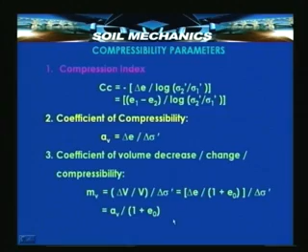What is important to notice is that Cc is a non-dimensional parameter dependent upon void ratio change and the logarithm of stress change, whereas Av, the coefficient of compressibility, depends upon the volumetric change or void ratio change and the stress change, particularly effective stress. Mv is nothing but Av divided by the constant volume of the solids. If the total volume is 1 plus E0, the volume of solids is 1 upon 1 plus E0 at any point of time, where E0 is the initial void ratio.

Therefore, Av upon 1 plus E0 is a parameter that represents compressibility in terms of the original volume of solids, which is invariant. This serves as a convenient denominator parameter for comparing different clays or soils with different Av values or different degrees of compressibility.

Let us take a quick look at the analogy, since we are going into the mathematical representation of this analogy. We defined a cylinder with a piston and a spring with an outlet for water. The cylinder represented the soil, the spring represented the soil skeleton, water represented the pore fluid, and the piston with its opening represented the pores, while the valve represented the degree of opening of the voids, or the permeability of the soil.

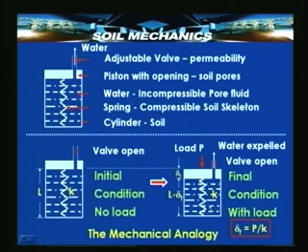Initially the soil is at rest, so there is no excess hydrostatic pressure because there is no load. But the moment you apply a load at t equal to 0, the water takes the load and gradually passes it on to the solids. Ultimately, at t equal to infinity, water would have escaped to such an extent as to bring back hydrostatic equilibrium, and the spring would have compressed by an amount delta final, equal to the load now completely transferred to the spring, P divided by the spring constant K, where P is the applied load.

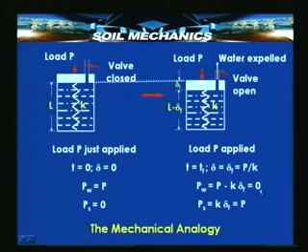If we take the consolidation part alone, as soon as we apply load at t equal to 0, there is no deformation of the spring. The load carried by the water is the complete load P, and the load carried by the solids is 0. But at the end of the consolidation phenomenon, the situation is different: the load carried by water is P minus the load carried by the spring. At t equal to infinity, K delta F becomes equal to P, and therefore water carries no load, whereas the solids carry the entire load P.

Now let us see the real situation. If we apply a surcharge Q, there is an initial pore pressure U equal to Q. When you apply the load at t equal to 0, U will be equal to Q and sigma dash is equal to 0. At the end of the consolidation phenomenon, the pore pressure is equal to U final and sigma dash is equal to sigma final. If we proceed further, the pore pressure gradually gets dissipated until U becomes equal to 0, and the entire sigma dash is carried by the solids in the form of Q.

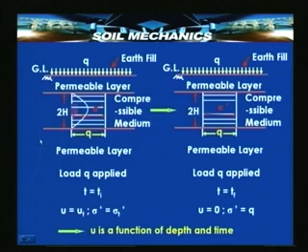This excess hydrostatic pressure U is a function of depth and time. This is the variation of U at any point of time. It is worth mentioning that it is 0 at the top permeable layer and also 0 at the bottom permeable layer. At t equal to 0, as soon as we apply the load, the entire applied pressure Q is carried by the water, and the water takes up a pore pressure U, an excess hydrostatic pressure over and above the hydrostatic, equal to U throughout its depth.

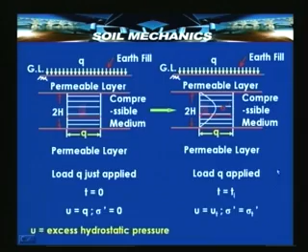Since the upper layer is permeable and the lower layer is also permeable, at these two points inside the clay layer, the compressible layer, the pressure is U, whereas just outside, because it is a draining layer, the pressure is 0. That means there is an infinite hydraulic gradient, so instantly the pore pressure U gets dissipated completely. That is why pore pressure is 0 at the two ends and maximum at the center, and this goes on. The ends constantly have pressure U equal to 0, whereas at the center the pore pressure is maximum, but its value keeps changing with time, ultimately decreasing to such an extent as to transfer the entire load to the solids in the form of sigma dash.

Now let us take a look at the mathematical formulation quickly, to the extent we had introduced it last time. We defined a number of parameters.

One is AV. AV is nothing but minus dE by dP, that is, the rate of change of void ratio with pressure, showing how the void ratio changes as pressure is increased. Since the void ratio decreases with increase in pressure, AV is minus dE by dP.

We also defined a parameter called the degree of consolidation corresponding to any depth, in terms of E. You may express it, as is usual, in the form of a percent. This is denoted as Uz, the degree of consolidation at any depth z. It will be equal to, at any given point of time, the initial void ratio minus the void ratio at that depth at that time, divided by the total change in void ratio.

This void ratio has to be related to pressure, and through the pressure it has to be related to the excess hydrostatic pressure. Then we can relate that to the rate at which water flows out, so that we can get the value of degree of consolidation at any point of time.

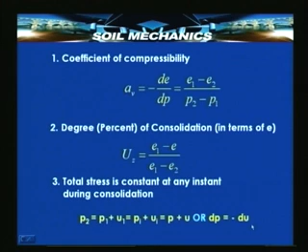So this gives us a way to express the degree of consolidation through E1 minus E, P minus P1, and finally Ui minus U. We get the degree of consolidation as 1 minus U upon Ui, where Ui is the initial excess hydrostatic pressure, and we know that the initial excess hydrostatic pressure is nothing but the external stress applied, that is in our case Q.

So if we sum up all this, dE is equal to minus AV dP, and it is also equal to AV dU. So here we have the indication as to how to link the change in hydrostatic pressure, excess pressure for that matter, through the change in stress to the degree of consolidation or change in void ratio.

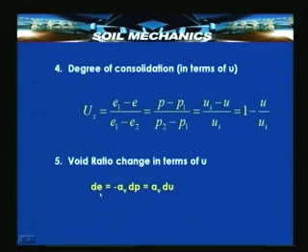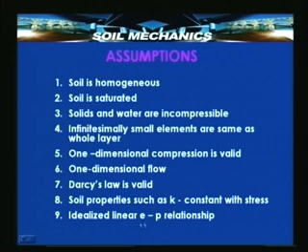For this purpose we made a series of assumptions: homogeneous, saturated, incompressible, one dimensional compression is valid, Darcy's law is valid, and an idealized linear e-P relationship is valid.

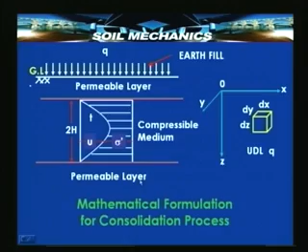For the purposes of mathematical formulation, we will consider a typical compressible layer with two permeable layers on either side. This is known as a double drainage system. The importance of this double drainage system will become evident after we finish the formulation of this problem in mathematical terms for a two directional, or double drainage, system.

This earth fill is nothing but the external load applied. We also saw last time that at the end of our mathematical analysis, we are going to have the degree of consolidation as a function of depth and time. For convenience, the degree of consolidation is expressed as a function of a non-dimensional depth and a non-dimensional time.

Non-dimensional depth is the actual absolute depth divided by the total thickness of the layer, and the non-dimensional time is nothing but CV times T divided by h squared.

I have still not defined what CV is, and therefore at a later date we will come back to this definition. These lines showing the variation of uz with depth and time are all similar in pattern, but as time increases, the degree of consolidation goes on increasing, or the pore pressure goes on decreasing. These are therefore lines of equal degree of consolidation with depth, known as isochrones.

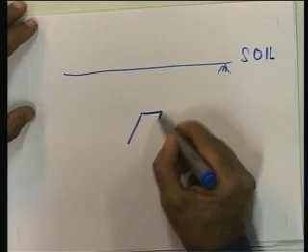Let us take a look at this slide, which shows a typical element in a homogeneous soil medium. Let me sketch it for convenience, for better understanding. We know we are dealing with a soil medium, and we will be considering a typical element in the medium. We have assumed homogeneity, so if we can analyze and understand any one element, it is as good as understanding the phenomenon over the entire medium.

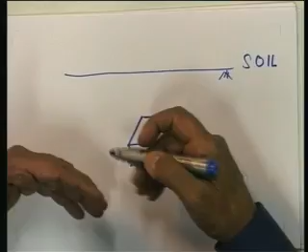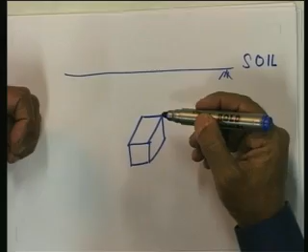Now, what is the phenomenon that we are going to understand? We are interested in knowing how water is flowing out of this element. It is very easy to utilize the knowledge that we have of flow through this element. Suppose a certain amount of water is flowing into this element and coming out. Now, the element is saturated.

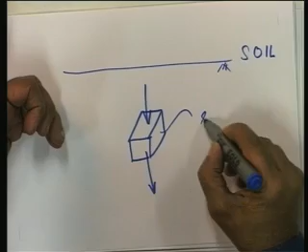Suppose this element is totally incompressible, then whatever water flows inside will also come outside. Every drop of water entering this saturated element will push out a corresponding drop of water, and therefore, whatever flows in will also come out.

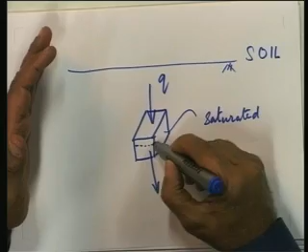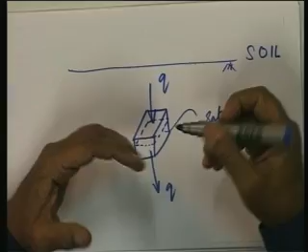But now we have a system where the soil is saturated, but as the water flows out, the soil compresses. So the element compresses, which means its volume decreases. As Q goes out, there is a small reduction in the volume of water, and therefore there is a difference in the quantity of flow between the outflow and the inflow. In the problem of consolidation, it is this net outflow that we are interested in.

We can obtain this by simple basic considerations. Suppose there is an inflow represented as Vz, where Vz is the velocity. Velocity is nothing but flow per unit time, and if we consider unit area, then Vz is flow per unit area per unit time. If the area is of finite dimensions delta x delta y, as shown here, where x, y, z axes are also shown...

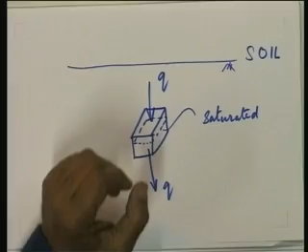...then the inflow and outflow will be different in this medium. Let us represent the inflow as Vz, that is flow per unit area per unit time, and the outflow as Vz plus an incremental flow, that is a rate of change of flow multiplied by the depth over which the flow takes place, that is Vz plus del Vz by del z into delta z.

However, we know that this rate of outflow from the element is going to be equivalent to the degree of compression that ultimately takes place. So let us see what this rate of outflow is, so that we can express it in terms of this volume and then relate it to the volumetric changes.

The net outflow from the element per unit time would obviously be this minus this. So del Vz by del z into delta z will give us the net outflow per unit time per unit area. If I multiply this by the area delta x delta y, then I get the outflow over the whole element, but still per unit time, and therefore this is nothing but the rate of outflow from the element.

We know that velocity, as per Darcy's law, is nothing but the coefficient of permeability into the hydraulic gradient. If we represent the head change from top to bottom as h or delta h, then delta h by delta z represents the hydraulic gradient. Since the head causing flow, that is h, decreases as the flow takes place in the direction of flow, Vz will be equal to minus k delta h by delta z. This is a very well known equation, which you must have already covered as Darcy's law in the chapter on permeability, flow through soils, flow nets, and so on.

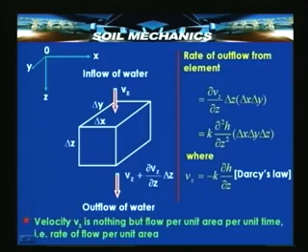Flow of water depends upon the rate of change of gradient, and that is also captured here, and the quantity of flow obviously depends upon the volume of the element, so that also enters into this equation. Now, this rate of outflow must be equal to the rate at which compression takes place.

Let us see: at any instant during the consolidation phenomenon, if the void ratio happens to be E, then the volume of the voids in the soil would be E upon 1 plus E, because the volume of the solid skeleton remains constant and 1 plus E is the total volume, so the volume of voids is E upon 1 plus E.

If I take the entire soil element of dimensions delta x, delta y, delta z, then the volume of voids in the element at any point of time to begin with will be E upon 1 plus E times delta x, delta y, delta z.

Now, as the flow takes place from inside the element to outside, this volume decreases. So the volumetric change in unit time, the rate of change of volume, which is nothing but the rate at which compression takes place, is the derivative of this volume of voids with respect to time, and that is the rate of change of voids.

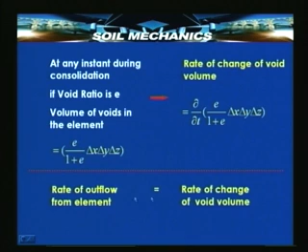Since this must be equal to the rate at which outflow is taking place, let us equate this. We then have k del-2-h by del-z-square into delta x, delta y, delta z is equal to all this, which means that if we cancel out the volume of the element, which is obviously not 0 since we are dealing with a finite size dimension of the element, the volume of the element is not 0.

If the volume of the element were 0, there would have been no problem to discuss at all. Therefore, in this case, this term can be cancelled out, and we will have k del-2-h by del-z-square equals del by del-t of E upon 1 plus E.

Now, this H, which is the head causing flow, is nothing but U upon gamma W, where U is the excess hydrostatic pressure. So this del-2-H by del-Z-square can be written as U upon gamma W, and so we will have K upon gamma W del-2-U by del-Z-square, where U now is the excess hydrostatic pressure. This must now be equal to del by del-T of E upon 1 plus E.

So let us equate them. If you equate this, this is what you get. But before equating, let us see what this del by del-T of E upon 1 plus E is. We have just now stated that 1 upon 1 plus E is the unchanging constant volume of the solids.

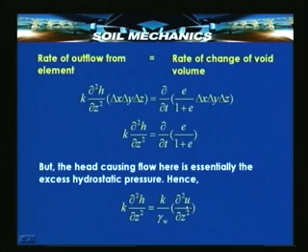related to dU, and from the previous slide, from this previous equation, we can equate this change in void ratio with K delta-2-U by delta-Z-square.

That is, if we equate the rate of flow with the rate of void compression and transfer the terms containing U to the two sides of the equation, then this is what we get. Here k, e, av, gamma w are all soil parameters, constants, so this whole left hand side can be written as C-V del-2-U by del-Z-square equal to the right hand side, which is del-U by del-T.

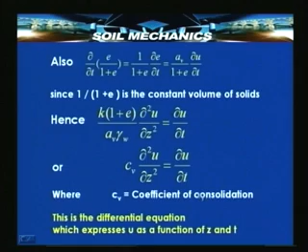We have now defined a new parameter Cv, the coefficient of consolidation, and this equation expresses U as a function of Z and T. This is what we were after - we were interested in this equation because we wanted to know the rate of change of U with time, so we could predict the compression corresponding to any time t.

This coefficient of consolidation is yet another parameter we have now defined, which makes the total number of compressibility parameters we have so far defined equal to 4. Let us take a quick look at these parameters.

The first one is minus dE by d log P. It has no units, because void ratio has no units, and log of the ratio of pressures also has no unit, whereas Av, which is a linear relationship between E and P, will have units of inverse of stress, because E has no unit, and 1 upon dP will have units of inverse of stress - that means centimeter square per kg or meter square by kilonewton.

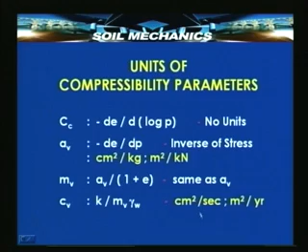Since K has units of centimeter per second and mv has units of meter square per kilonewton and gamma w has units of kilonewton per meter cube, effectively we will have units of centimeter square per second or meter square per year. Now we have come to a stage where we have the governing equation for this phenomenon of consolidation.

This equation, Cv del 2 u by del z square equal to del u by del t, is the equation which controls or depicts very clearly the phenomenon of consolidation, and not only that - it is seen that this in general represents any process where diffusion is the major phenomenon. So this equation is also very often known as the diffusion equation.

This equation has to be solved. If this equation is solved, then we will get an expression for u in terms of z and t. What is important to notice is on the left hand side we have the rate of change of pore pressure, hydrostatic excess pressure, as a function of z, and on the right hand side we have its rate of change with respect to time. So if we solve this, u as a function of z as well as t can be obtained.

Then what is the best way to solve this? The best way would be to assume the solution as a product of a function of only z and a function of only time. This is known as the principle of separation of variables in theory of differential equations. Suppose, following that, we express the excess hydrostatic pressure as a product of two independent functions - one a function of only z, another a function of only t - then there are certain advantages in solving them.

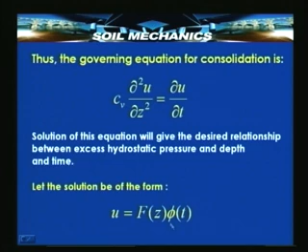Since we have already written the differential equation Cv del 2 u by del z square equal to del u by del t, and we have defined u as f(z)·phi(t), let us substitute this value of u by suitable differentiation in the consolidation equation. That means del 2 u by del z square is required, so differentiate f(z)·phi(t) with respect to z.

Since when you differentiate u with respect to z, phi(t) will remain constant, we have Cv·phi(t)·f''(z), which is the second derivative of u with respect to z. On the right hand side, since we have del u upon del t, and when you differentiate with respect to time the function f(z) remains constant, we have f(z)·phi'(t), where phi' is the first derivative of u with respect to time.

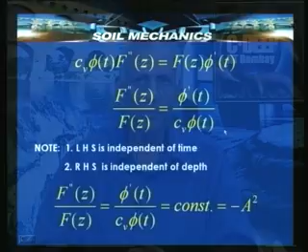We can completely separate the two variables z and t by bringing this here and this here, so that we will have an equality of this kind. Now, let us take a look at this equality.

This equality suggests that on the left hand side we have no time parameter, and on the right hand side we have no depth parameter. That means the left hand side is completely independent of time and the right hand side is completely independent of depth, and that is only possible if this ratio is equal to some constant. One is a function of z, the other is a function of time, and they are equal, and that is only possible if the ratio is a constant.

Let us represent this constant as minus a square. The reason why we are representing it as a square and as a negative quantity will become evident. It is for getting an elegant equation which can be solved comfortably.

If we take the ratio as constant equal to minus a square, then we get an equation like this, which is a very elegant and very convenient equation consisting of the derivatives of the function in terms of z, and we also get another part where phi dash t is minus a square C v phi t. So we have one equation consisting of the derivatives of z only, and another equation consisting of the derivatives of only the function of time phi.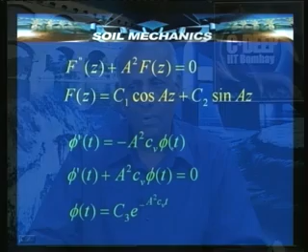We can continue like this with phi t as well. So continuing, the second part of the equation would be phi dash t equals minus a square C v phi t, or in other words, in a manner analogous to the equation which we wrote for z, we can say phi dash t plus a square C v phi t equal to 0.

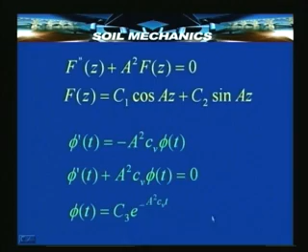Just as the expression with respect to z had a standard solution C1 cos a z plus C2 sin a z, this equation also has a standard solution phi t equal to a constant C3 into exponential minus a square C v t. So now we have two solutions, one in terms of z and another in terms of t, and these contain constants C1, C2 and C3.

Now, since the expression for u is f z phi t, the expression for u will obviously be the product of this and this. So u will be equal to C1 cos a z plus C2 sin a z, multiplied by C3 e to the power minus a square C v t. In this, there are two constants inside the bracket and one outside, and in addition to that, there is that constant a which we had introduced right in the beginning.

If we unify these by expanding the bracket, then we will have C4 cos a z plus C5 sin a z into e to the power of minus a square C v t for the excess hydrostatic pressure u, which means now that in order to be able to compute u, we should be able to determine the constants C4, C5, and a. Although they were originally 4 constants, effectively now we have brought it down to 3 constants.

Now these 3 constants C4, C5 and a have to be determined, and in order to determine 3 constants, we need 3 conditions. Since this is a problem in which the parameter to be determined, that is u, is a function of depth as well as time, we need to have a boundary condition related to the depth, as well as the so called initial conditions related to the time factor t. So we need in all 3 conditions. Some of them could be conditions relating to the depth and some of them could be conditions relating to time t.

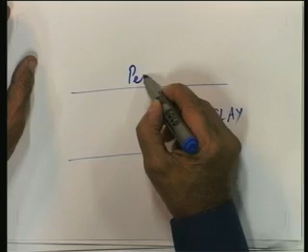Let us take this clay layer and our already existing knowledge of pore pressure variations. This is our clay layer. On top we have a permeable layer, and at the bottom we have a permeable layer, and because of this it is known as the double drainage case.

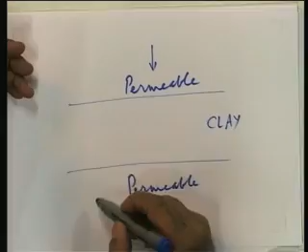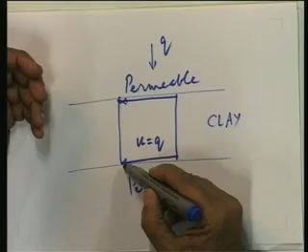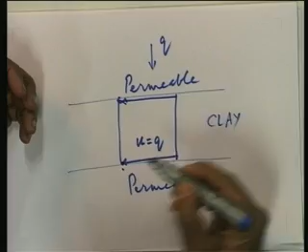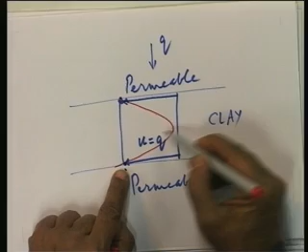When we apply load, although initially the pore pressure from top to bottom is equal to u equal to the applied load q, at the very next instant, because the pressure is u equal to q on the inner side of the boundary and equal to atmospheric or zero on the outer side, the pressure u immediately gets dissipated and becomes zero here. This means the pressure distribution becomes somewhat like this: zero at the boundaries, with some pressure already dissipated at the center, reduced a little from the initial value, but still maximum at the center of the clay layer.

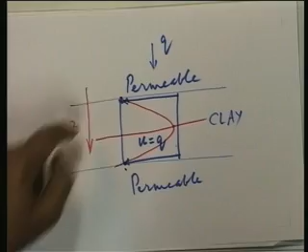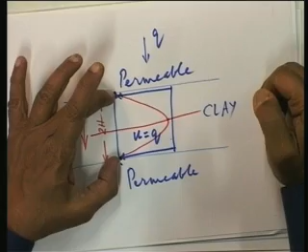So we can state or stipulate the boundary conditions like this. If z is the coordinate describing depth, then at z equal to 0 and at z equal to 2h, where 2h is the depth of the clay layer, we know that the excess hydrostatic pressure u must be 0, not only at the initial instant but continuing to be 0 at all times until the entire process is completed. So at z equal to 0 and z equal to 2h, u is 0 at all times for t greater than 0, except at the very first initial instant, where as soon as the load is applied, the excess pore pressure is just equal to the applied pressure q.

Now we already have two conditions, and possibly we can determine 2 out of these 3 constants. One other condition we need is an initial condition, because since 2 of these are boundary conditions related to z, we must now look for a condition that tells us how the excess hydrostatic pressure varies with time, and that also can be easily stipulated.

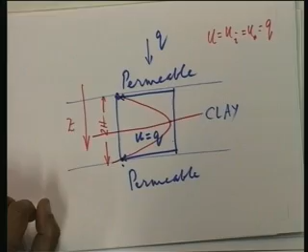When t is equal to 0, u, the excess hydrostatic pressure, will have some initial value. This initial value may be called u initial, or some fixed value u0, or in any case it will always be equal to the applied stress q. So at t equal to 0, u is equal to the initial excess hydrostatic pressure, whatever the value, and this is valid throughout the depth of the clay layer. At t equal to 0, throughout the depth, u is equal to a fixed value equal to q, that is, uniformly distributed. That is another condition we can advantageously use to determine the constants.

So if we apply these boundary conditions, we will get an expression for u. Let us go back for a moment. This is the equation in which we want to determine the constants. Since we know the values of u at certain values of z and at certain time t, what we can do is substitute these values of z or this value of t here and write down the expression for u.

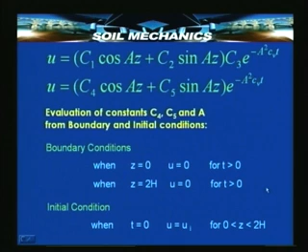If we do that, then by successively substituting these conditions one by one—first this condition, then the second, then the third—we get a series of equations which can be solved. We can evaluate the constants and substitute them back into the expression for u, so that we get an expression which represents the variation of u with respect to depth and time.

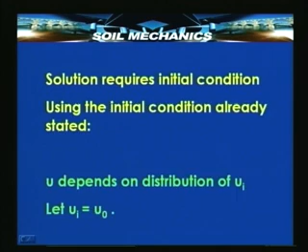In the summation sign, n varies from 1 to infinity. The reason we brought in this summation sign is that the solution to this equation is in terms of sine and cosine, and when we substitute the boundary conditions, we found that the constant A works out in terms of n pi, to be precise. This equation is valid for all values of n, so there is one solution for u corresponding to each value of n, meaning the final real solution is the sum of all these solutions for all possible values of n. The possible values of n are only integers from 1 to infinity, so we have infinite solutions, n equal 1 to infinity, and this entire factor within the summation sign gives the real value of u taking into account all possible solutions.

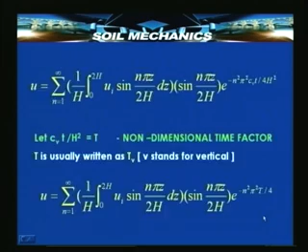Continuing further, we found that we can rewrite this expression for u in terms of another parameter capital M, which depends on a parameter small m, related to capital M as: capital M equals (2m+1) into pi by 2. When we go into the details of the consolidation equation, we find that for the parameter small n, which could be even or odd, the values corresponding to even n do not exist or vanish, and the solution really contains only terms corresponding to odd values of n. These odd values can always be expressed as 2m+1, so where we had n pi upon 2, since only odd terms are considered, we now have (2m+1) pi by 2, which for convenience is represented as capital M.

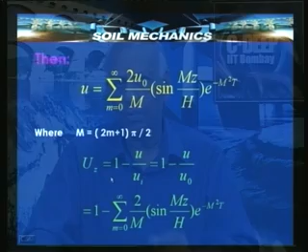So we have here a function in which u is dependent upon the initial pore pressure distribution, the parameter capital M, z upon h (the non-dimensional depth), and the non-dimensional time factor Tv. Going back to our set of expressions, the degree of consolidation Uz corresponding to any particular depth can be expressed as 1 minus u upon ui, but ui is u0, so this is 1 minus u upon u0.

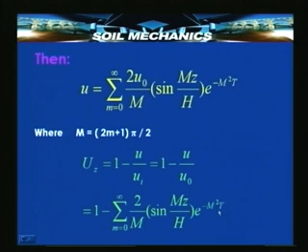Since we have already evaluated small u, we can get the expression for capital Uz, which is the degree of consolidation at any depth. In this expression we again have the non-dimensional time factor and the parameter capital M.

This expression can be graphically represented in the form of isochrones, as shown here. In that expression for Uz we had the non-dimensional depth z by h and the non-dimensional time factor Tv. So suppose we substitute different values of T equal to 0, 0.05, 0.1, and so on up to 0.8, then at different values of z by h we will get different Uz values, and this is how the Uz values will vary.

These are known as isochrones, meaning these are the values of Uz corresponding to a constant time factor. For example, here we have a line corresponding to T equal to 0.05. At a depth corresponding to z upon h equal to, say, 0.1, there is at time T equal to 0.05 a certain Uz value, let us say this. Then at the same time at another depth we have Uz equal to 0. So the Uz values vary with depth, and at a particular time T this will be the nature of distribution of Uz with depth.

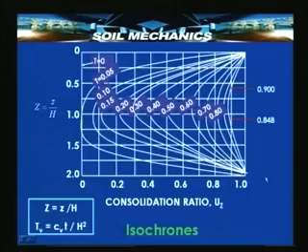Now there is one more parameter which is of importance. We have been able to determine the degree of consolidation as a function of depth, but in any given practical situation, rather than looking for the degree of consolidation at a particular depth, we would like to know the average degree of consolidation over the entire depth of the clay layer. Since we know what Uz is, it is possible to determine the average U by integrating it over the entire depth and averaging it over the depth 2h. This can be done step by step to get a final expression.

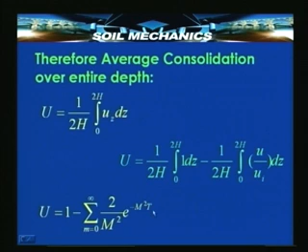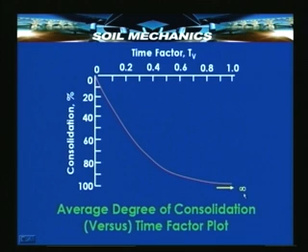If you take this final expression, the average degree of consolidation, and relate it to capital T and see its variation, you will find that the average consolidation varies with time factor Tv in such a way that it becomes maximum, becomes 100%, at t equal to infinity.

So in today's lecture we have seen the details of the derivation of an expression for u, which is the mathematical treatment of the phenomenon of one dimensional consolidation. In the next lecture we will develop further understanding of the physical nature of this mathematical expression. Then we will go into the details of determining the coefficient of consolidation Cv, which is important for determining the time factor, the pore pressure, the degree of consolidation, and the average degree of consolidation. We will reinforce all these concepts with the help of a few examples. Thank you.